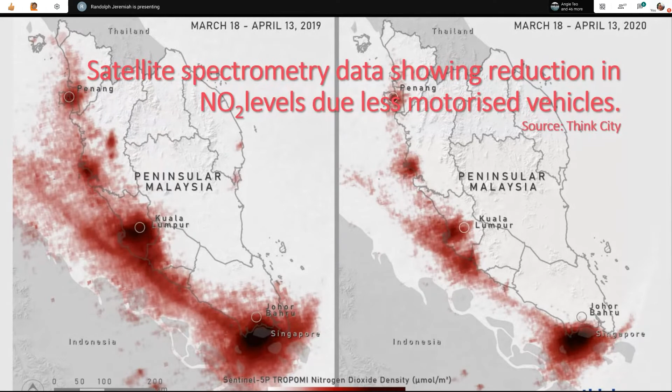In relation to rivers, we know that Sungai Pinang has now turned green from what was before a dark, heavily polluted river. Similarly, in Melaka, Sungai Melaka is reportedly flowing clearer based on DID's observations, and they say it has shown some signs of self-healing.

And of course, we have seen many reports in the newspaper on the Klang River. It's believed to have improved in terms of water quality, and it seems to be getting better—attributed to less waste and pollution going into the river. Local communities themselves have also reported that the river now looks much better than before.

However, at the same time, we are still faced with a number of issues related to water quality. For example, there was a disruption at Sungai Selangor, probably due to odor pollution. Similarly, the waste being picked up in rivers now includes face masks, gloves, and sanitizer bottles.

So against this backdrop, I have a few questions to pose to our stakeholders and to everyone. First, has the river really improved in Malaysia? Second, if it has, is this a sign that environmental damage can be reversed, and if so, what measures should stakeholders undertake post-MCO to better manage our rivers? Or will we adopt a business-as-usual approach?

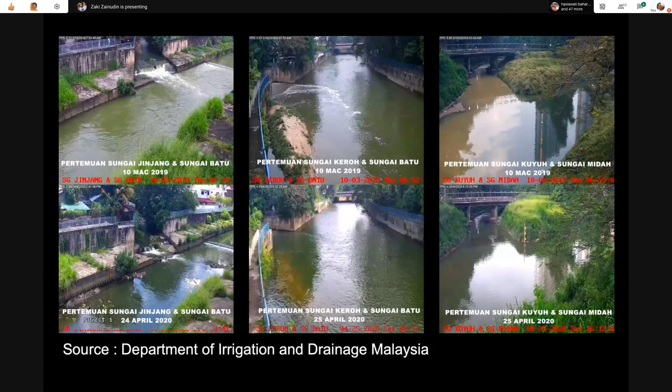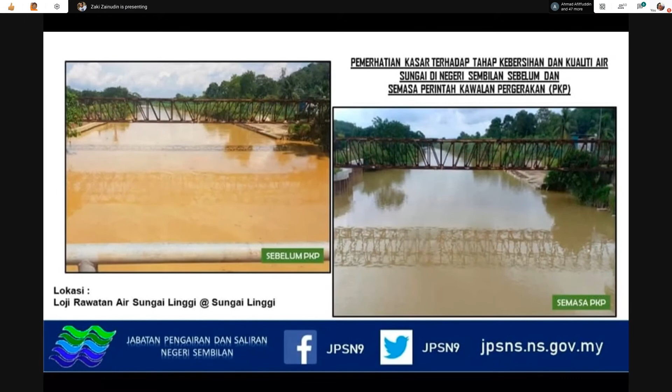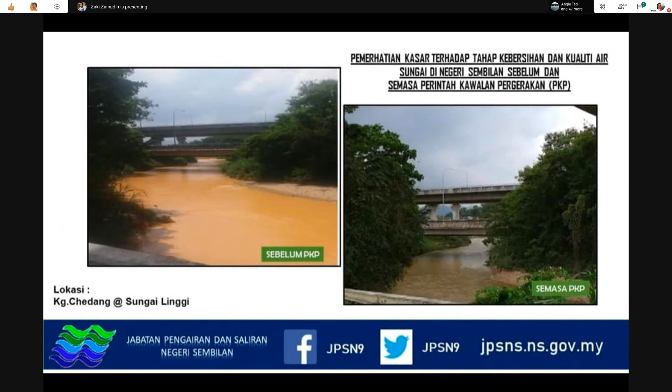As we all know, and as what was presented just now, there have been some perceived improvements in river water quality. These are pictures I got from the Department of Irrigation and Drainage's Facebook page. You can see, like in Sungai Linggi, for example, before the movement control order the water quality was turbid, and during the PKP there seems to be a perceived improvement in river water quality. Similarly, Sungai Linggi on the other side also shows this perceived improvement, and in Sungai Malacca and Sungai Kim Kim, all seem to have improved in terms of visual appearance.

So this was actually reported quite extensively in the media, not just here in Malaysia, but also in various parts of the world—this visual improvement in river water quality.

So it seems that some of the river water quality in various parts of the country has improved. However, I would also like to remind you that perceived improvement is one thing, actual improvement is another. Sometimes it's a matter of point of view.

There is definitely some perceived improvement in certain river systems, but whether that can be substantiated with scientific data, that's another matter. Now this is the official water quality result published by the Department of Environment, Malaysia.

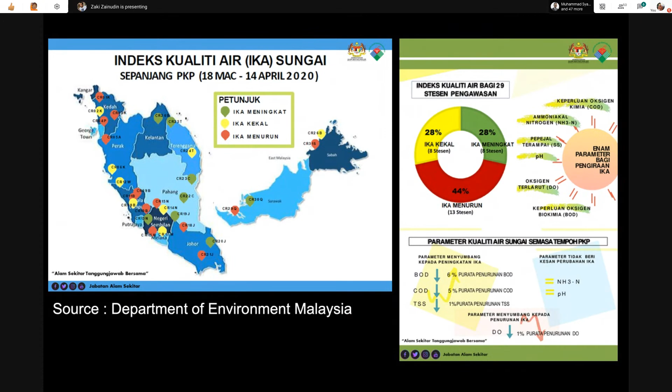The problem with substantiating water quality during the MCO is that there are some limitations with regards to sampling. Now thank goodness the Department of Environment actually maintains online telemetry stations. There are 29 online stations as of the moment.

So these stations monitor parameters like dissolved oxygen, temperature, conductivity, salinity, BOD equivalent, COD equivalent, TSS, ammonium, pH, and certain hydrocarbons. The measurements are taken at every 30 minute interval and they are logged. So these are continuous stations.

The data is monitored online, continuously online, and that's pulled to a data center located in DOE HQ. So this is a sensor.

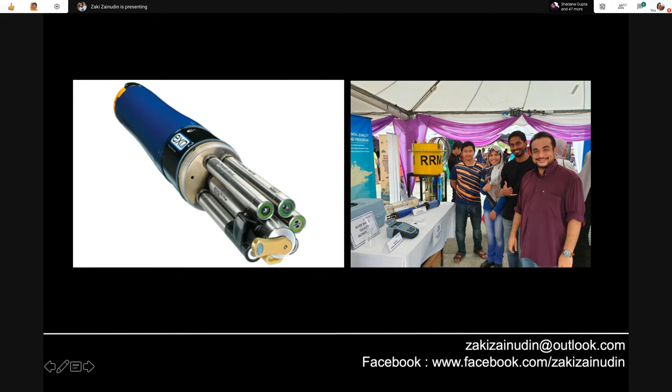This is their sensor, an example of one of the sensors in one of the stations. As I said, there are 29 of these online sensors all over the country. So this is the setup. These are my students from UTM. I brought them to doing Hari Alam Sekitar Negara.

So this is an example of the layout of the telemetry station data center in DOE HQ. The data basically gives the WQI output from the online stations, and that gives the WQI classification, the water quality index classification. So that preliminary analysis was done by DOE because of

certain hindrances to do sampling, manual sampling during the MCO. That data, the water quality status, was actually from the online stations, not the manual stations per se.

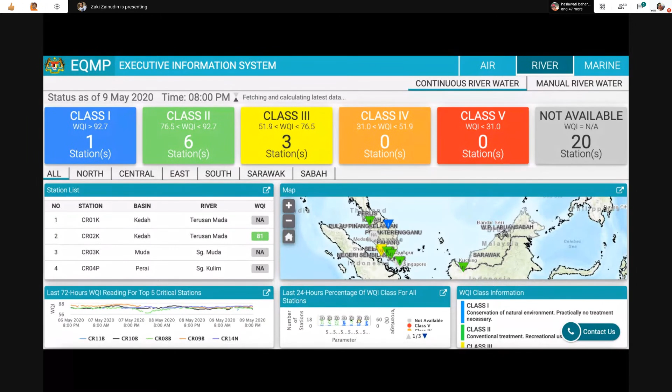Based on data from the online stations that they have at the moment, 8 stations out of the 29 stations showed water quality improvement. Whereas another 8 stations, which is another 28%, did not show any improvement.

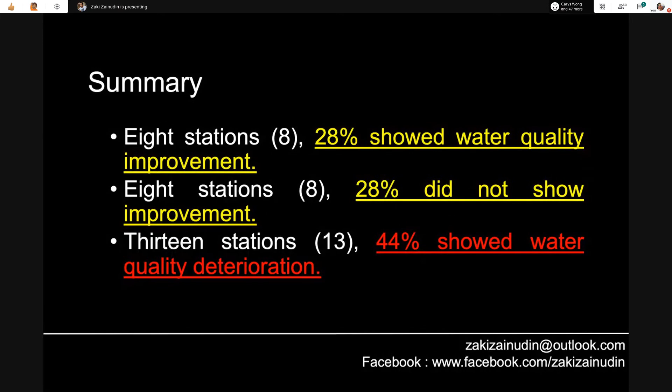But ironically, 13 stations from their online continuous stations, which makes up 44% of the stations, actually showed deterioration in water quality, which is very, very interesting. So sometimes perceived improvement is one thing, but finally the data is showing these variations.

Now the data also shows that there is some average improvement in BOD and COD. But again, BOD reduced by 6% and COD by 5%. It's also important to remember that these are BOD equivalents as monitored by the online stations. Average ammonia generally remained unchanged. And TSS and garbage also increase during rainfall in certain watersheds.

Now this is another thing. When you talk about improvement pre and during MCO, there has to be an apple-to-apple comparison.

But the tricky part is the MCO more or less happened at the beginning of the rainy season. So there was an interference in terms of weather influence on river water quality and runoff influence. So to say there was a blanket improvement, you have to be very careful about that.

And that's why when I was asked by the media for my thoughts, I just said that it's not a blanket improvement. Sure, there are certain improvements in certain watersheds, but it's not a blanket improvement because water quality is a function of pollution within a specific watershed.

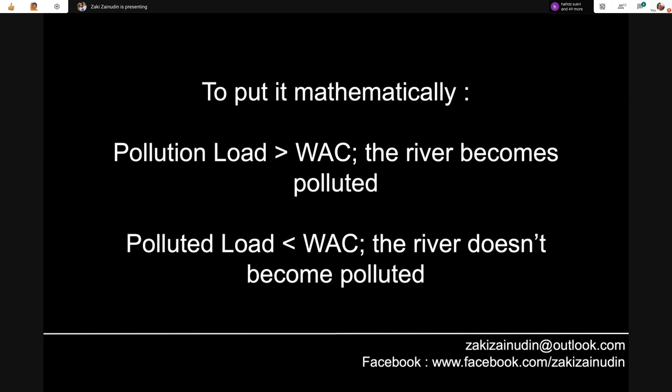And these are all quantifiable. These can be quantified through mathematical modeling, mathematical calculations. So factors that influence the assimilative capacity, the ability of the river to dilute the waste...

Of course, the river size. How big is the river? A river that is bigger, that is larger, tends to be able to take in more waste. The river that is smaller in size and volume would be more sensitive to pollution.

So even the bigger and smaller rivers are influenced by hydrological changes. During the dry period, where there's lesser dilution volume compared to the high flow season, that also affects the carrying capacity. And then, of course, you have the biochemical, the chemistry processes taking place in the water column. So all of this affects the river's carrying capacity.

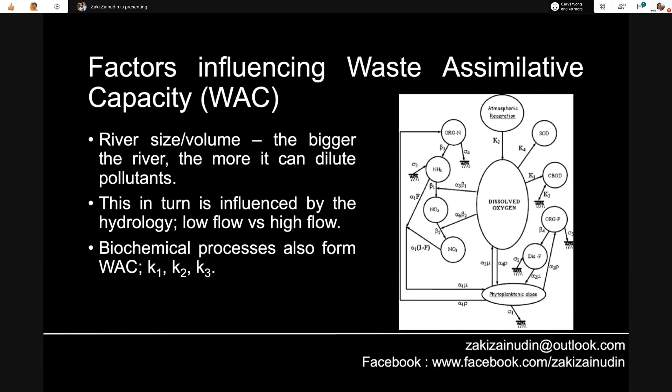Now, in my final slide, I like to show this slide. I always like to show this slide. In a river system, you have many types of pollution sources that are released into the river. You have industrial sources, sewage treatment plants, sewage sources, and sources that are not subject to EQA - say, like on the left part of the screen.

So all these sources are contributing about 230 kilograms of pollutant, whatever type of pollutant, into the river. But then again, the river carrying capacity is 250 kilograms per day. As I showed you earlier, as long as the pollution loading doesn't exceed this carrying capacity, the river won't become polluted.

And then suddenly here, you have an illegal discharge going into the river at 40 kilograms per day. So now the new pollution loading in the river is 270, whereas the river carrying capacity is only 250. So now, at 270 kilograms per day, because of this illegal discharge, the river becomes polluted because it has exceeded the carrying capacity.

But here is the point to ponder. Sure, this is an illegal discharge, discharging at 40 kilograms per day of waste. But then again, all these other sources - industrial sources, sewage sources, other sewage sources not subject to the law - they are discharging 230 kilograms per day, where this one illegal guy is only discharging 40 kilos per day. So does that mean he is the only person to blame for the river pollution status?

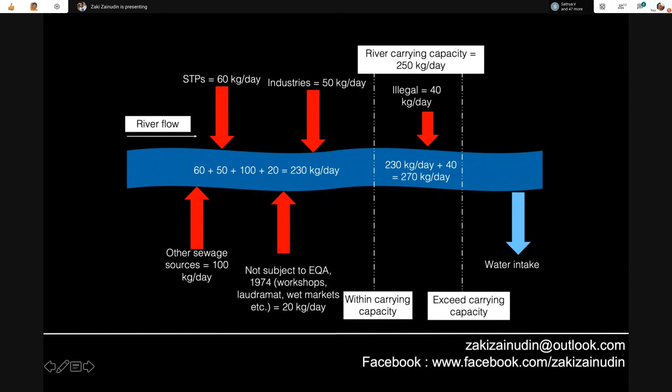All right, so I think that's my slide. Thank you very much.

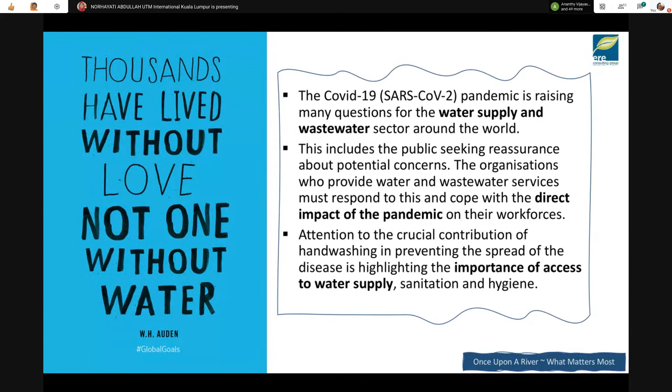Similarly to what Randolph began the session with, as we can see in the newspaper, online, on social media, everybody is focusing on how the movement control order, which came into force on March 18, has led to about a 43% reduction in the total amount of rubbish extracted from Klang River. Bernama, for example, has reported a similar thing. There's a clear indication that the minimization of movement of people and business operations can actually help a river heal - Dr. Zaki has indicated some data that supports this. However, we have to also be careful because sometimes what we see with our own eyes is not the same as what is hidden in the data itself when the river water quality is analyzed.

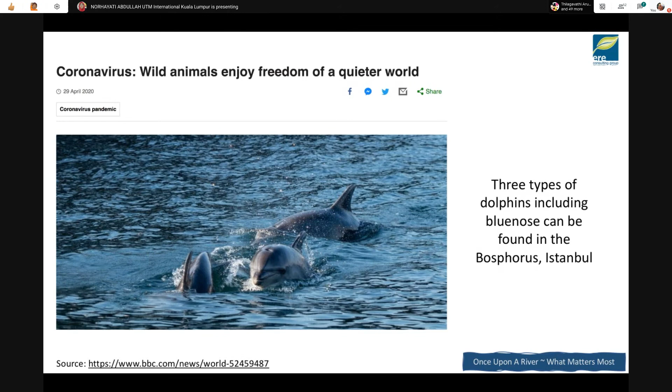Just sharing with you, for example, in Istanbul, wild animals enjoy freedom of a quieter world, coming up to enjoy the cleaner river water. It has also been reported that turtles appear to be returning to Thai beaches, the Himalayas are clearly visible from Delhi for the first time in years, and dolphins are seen closer to the shores in Istanbul.

Here in our country, the skies are blue, the air is cleaner and clear, less noise, and we hear a cacophony of the sweet sounds of nature that we would never have heard or noticed before. So our rivers have also never been so clean.

We have been staying indoors, trying to help the frontliners curb the pandemic, COVID-19. We can say there have been minimal pollutants towards the environment because factories have temporarily ceased operations and there are fewer cars on the roads.

So in over a month, and now we're going to the next level of MCO, reports and headlines have surfaced that rivers across Malaysia look much, much clearer and cleaner, and as reported, we even had wildlife returning to enjoy the clean waters.

So as human beings, as the public, as someone who lives in this world, how would you feel to have all of this maintained post-MCO? It's part of our job to think of what matters most in terms of protecting the continued improvement of our river water quality.

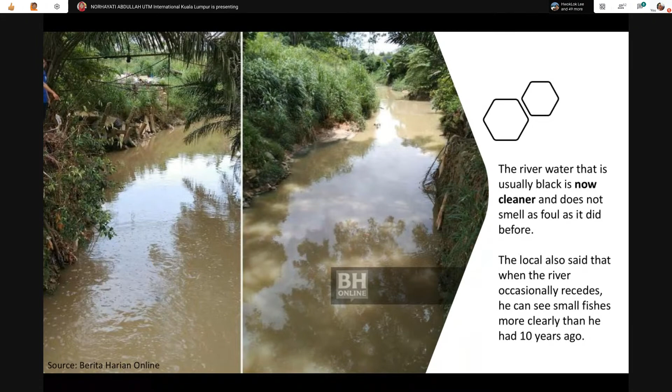Sungai Melaka, as shared by Randolph, you can see the small fishes in the river, it's cleaner and greener. The interview with locals revealed that the river has not achieved this level of cleanliness in a long, long time, and they observe fishes and monitor lizards sighted in the water. So this is a good sign that the river is actually healing in its own way.

Before the MCO, Sungai Melaka water was known for being smelly and murky with teh tarik colored water. This is definitely something that we are not seeing now, post-MCO, after a couple of weeks.

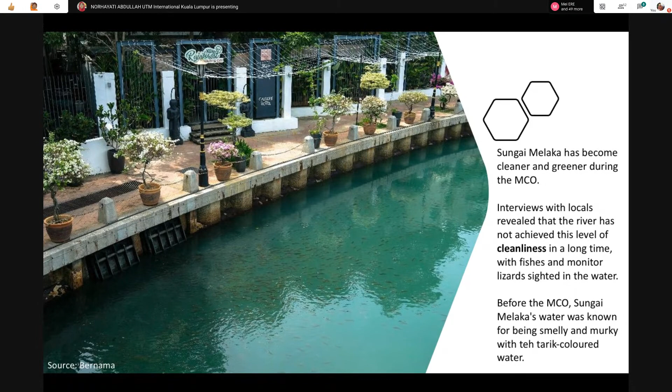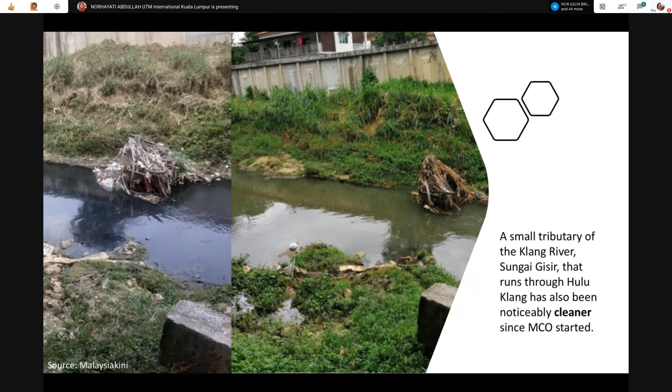And then Sungai Gisir. I'm not familiar with some of these rivers, but I'm sharing with you some pictures from Malaysiakini. This river runs through Hulu Klang and it has been noticeably cleaner. You can see the left picture is black, and the right picture is much cleaner, a jade green color, since the MCO started.

Just to share with you the quality of river water that can enhance our lifestyle - these things can happen in Malaysia too, and not just in Japan. Japan has many good, clean rivers, and all sorts of interesting activities take place in their beautiful and clean rivers. So this is something that we wish to look forward to for Malaysia post-MCO.

We want to have these sort of river water quality activities in our country. I was in Sarawak a couple of months back for a water quality project, and it was very nice, something we should be aiming for post-MCO - this sort of river water associated activities for the public so we could appreciate more what we have in nature. So, once upon a river, what matters most?

I put 3 key points here: raise awareness and educate stakeholders, which many NGOs are currently doing. The MWA and IWA are doing lots of online platform and sharing, and we know that reaching out to public and water stakeholders is very important.

Number 2 is to promote civic consciousness and empower local action. It's our job to take action, and it's our role to support all the initiatives in terms of restoring and protecting rivers.

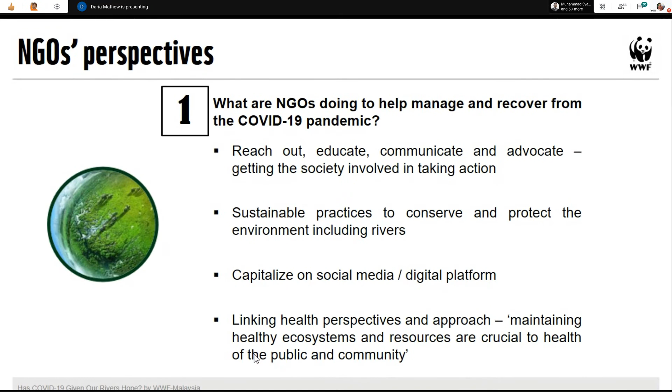I'm showing in the next few slides some examples of the key messages, information, and activities done by the major NGOs in Malaysia. Global Environment Center has been very active - they've done online webinars via Zoom, via Facebook Live, various sessions. They even did training of trainers on River Ranger, on water quality monitoring, via online. So it's actually really possible, even if you don't do it via a physical or face-to-face session. They've also done an Insta video contest.

The contest is actually to promote best management practices. They include themes like 'water is life, river is lifeline' to get the public and society to not lose sight of the river. We are indoors, we don't see the river, it's outside, but through messaging and activities like this, we continue to promote and remind the public not to forget their connection to the river.

EcoKnights is another NGO that has been very active during this MCO period. They've recently introduced their School of Sustainability, an online series that's very interesting and innovative. They do webinars, panel discussions, and workshops, and also leverage on different festivals like Ramadan, Wesak Day, Earth Day, and World Water Day.

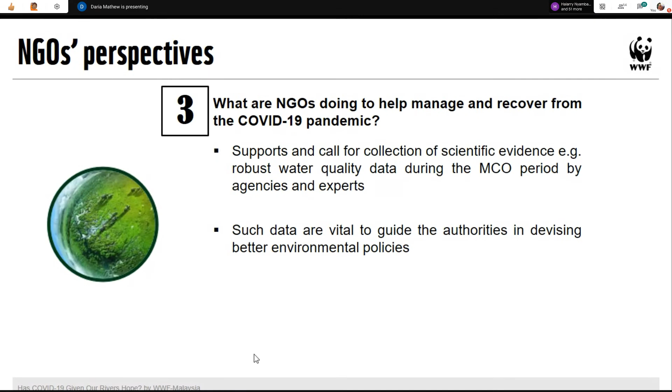Right, so I think I'll stop there for now. Okay, thank you, Daria.

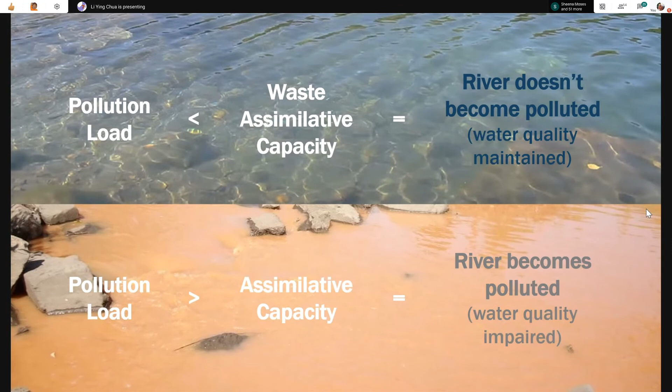For example, imagine large rivers in Malaysia like Sungai Kinabatangan and Sungai Rajang, where the river is huge. Let's say you have 5 palm oil mills discharging into the river—the river itself may be able to accommodate that pollution load. But if we take the same 5 factories discharging the same load and put them into a smaller river catchment, for instance Sungai Melaka, I think Sungai Melaka will be torn apart, because its capacity is smaller than Kinabatangan's.

So this is what we mean by the assimilative capacity or carrying capacity of a river versus the pollution load that goes into it.

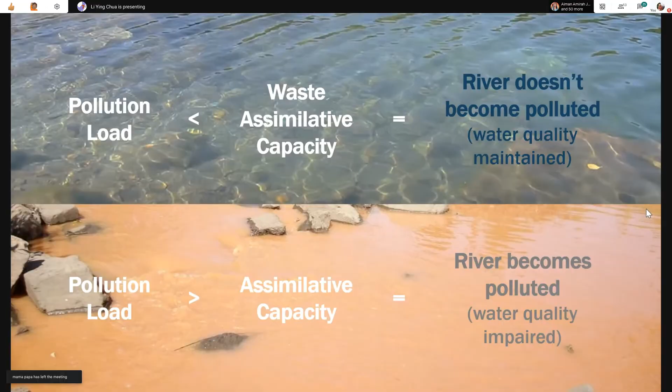A few years back, we carried out a study for a river in Malaysia on pollution load control. What we did was identify all the beneficial users of the river.

Most rivers in Malaysia have similar beneficial users, because rivers mainly function as maintenance of healthy aquatic habitats and ecosystems. They're also a source of water supply for both potable water and industrial processes. As Datin Daria said, 97% of our freshwater supply comes from rivers. Rivers also have value for recreational users, as a source of water for fish production—whether cage culture or aquaculture—for livestock drinking, and of course for agriculture, basically a source of water for our food production in the country.

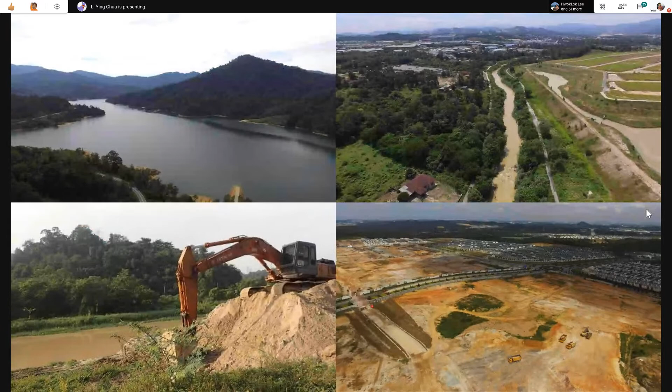When we did this study, the river catchment was quite similar to most rivers in Malaysia. The upper catchment is mostly forested agricultural land. As the river flows downstream, development comes up—you have villages, then eventually townships. That particular catchment is also very actively developing, so there's a lot of new development going on.

This is a construction site for residential areas, and there's also sand mining in this particular river. This river also supplies water to parts of Klang Valley. The water quality of the river is not too bad, but could be better.

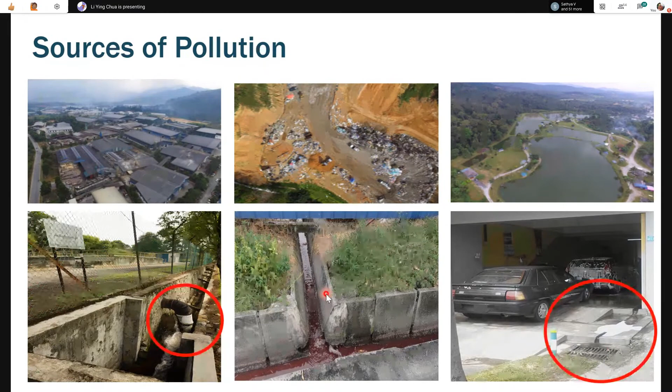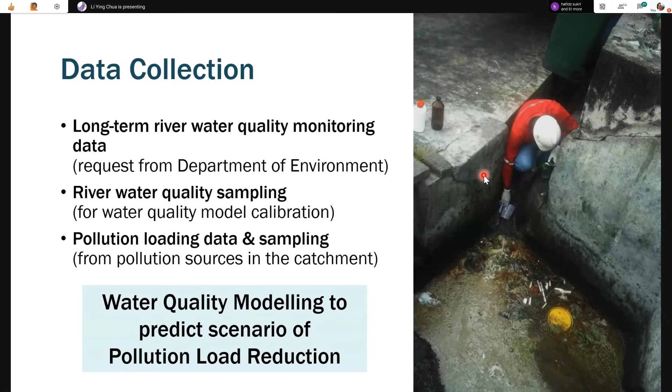With all that, we wanted to do water quality modeling to predict the scenario of pollution load reduction—if we can reduce specific pollution loads in the catchment, what the outcome may be for the river. The first example is sewage treatment plants, because they have the highest loading by premise and cumulatively for ammoniacal nitrogen, mainly due to the large volume of effluent discharge.

You know how Dr. Zaki mentioned just now that a pollution load has two components: you have your flow, which is the quantity of discharge, and you have your concentration, the quality of discharge. So relative to all the pollution sources, sewage treatment plants have the largest volume of effluent discharge because they are servicing the whole population of the catchment.

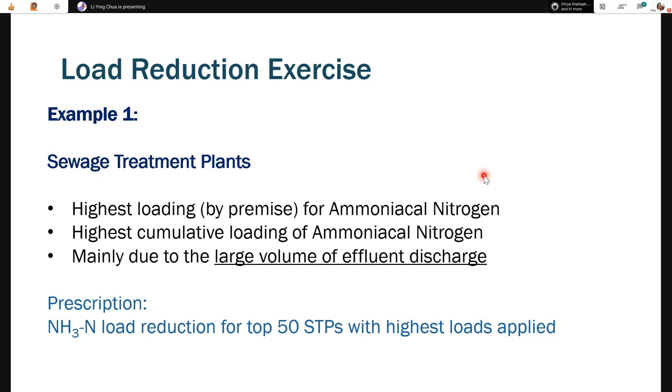So what we did was we prescribed a load reduction to just the top 50 STPs in the catchment. There were about 100-plus sewage treatment plants within the whole catchment, so we ranked them by the ones with the highest loads. We reduced their load by reducing the concentration that they could discharge.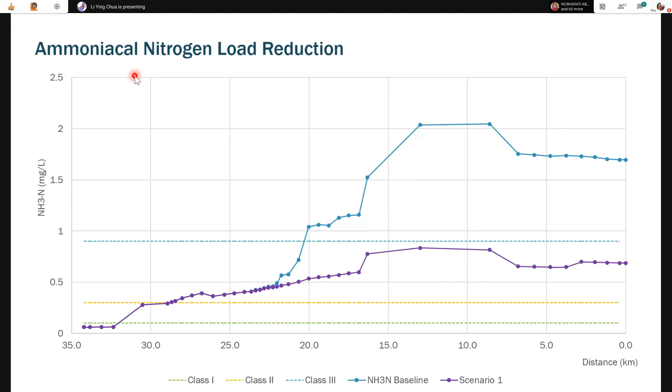Another example is for biochemical oxygen demand, BOD. In this exercise, we are looking at restaurants, wet markets, laundromats, and car washes. Restaurants are the highest load contributor, followed by wet markets, laundromats, and car wash. What we did was have two scenarios: one is a 50% reduction, and the second is a 100% reduction, just to try it out.

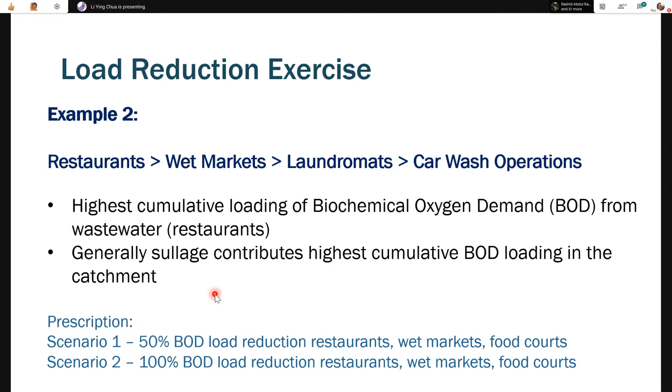So this is what we'll see: this is the existing BOD concentration in the river. Again, this is a different one, a tributary, 18 kilometers long upstream to downstream. With 50% reduction of BOD, you actually see a fall, an improvement in BOD in the rivers. A 100% reduction would be even better. But just from this, you can see that even if you reduce the pollution load from restaurants by 50%, you actually see an improvement in the water quality of the river.

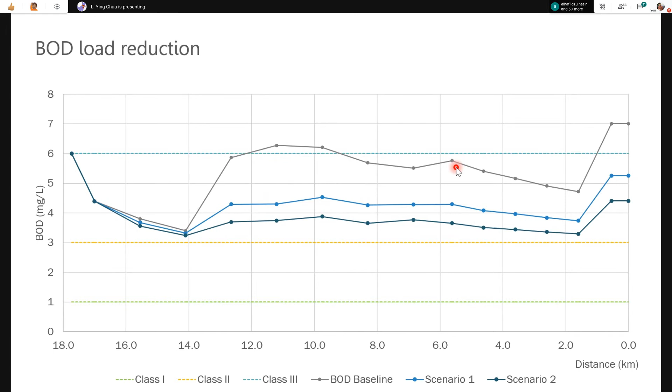A 50% reduction could be like reduced operations or better waste management practices, things like that. But we also have to remember that water quality modeling, to an extent, has limitations. It's academic sometimes—it gives us a snapshot of possibilities, but it may not be exact in real life because there are a lot of other variables that sometimes we cannot capture in our model. For instance, in this whole thing, I did not mention non-point sources, like runoff from construction sites and all that. There's also unrecorded pollution sources, because we can find as many as we can, but there are always pollution sources that might fall through the cracks or are very hard to document. The weather factor sometimes gives us a variation of outcomes as well.

So to me, the MCO was an excellent opportunity to observe what happens when pollution sources get switched off. Because prior to this, when we did our modeling, this is what we aspired to, what we hoped it could achieve, but we could never actually turn off or stop restaurants from operating or things like that. But the MCO actually gave us the opportunity to see that.

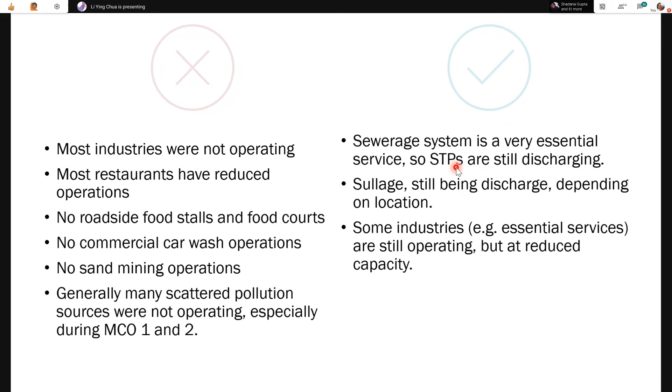That said, I was thinking about some of the research opportunities that we can do post-MCO. Firstly, on water quality trends. I think it's very important and very interesting to see the data trend before, during, and after MCO. Although during MCO we might have a limited amount of data, it'd be interesting to see were there any changes and how big were the changes, and what were the parameters, because the parameters actually indicate to us what are the pollution sources contributing to it.

So it'll be interesting for someone to pick a catchment, a small catchment, and do this. From there, you can actually pinpoint what are the pollution sources that are actually affecting the water quality of the river the most. And through that, look into opportunities of whether it is possible to continue reducing the load from those pollution sources.

The second one is about maintaining good water quality. The issue here is that post-MCO, people and the economy will try to pick up again. And as we know, the environment typically has the lowest priority. Everyone wants to recoup their losses and all that, so investment into pollution control technology will be at the bottom of the list, because it will be extra expenses.

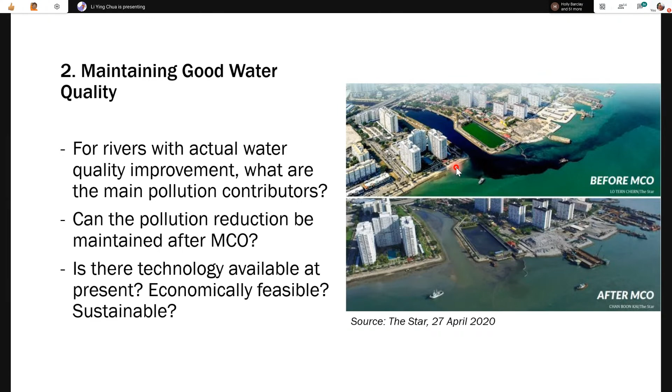Okay, thank you, Li Ying. I'll just go through some questions right now. I may post some to some of our panelists.

First of all, in terms of data, of course we do have data. The Department of Environment still monitors data, although during the MCO period, most data was from the automated monitoring stations. It would be interesting to compare data before and after MCO, and also compare data with the same period over previous years. So I think that is something that can be put in motion after the MCO is lifted, and it will be interesting to see whether there are significant results as a result of the MCO.

There was another question in terms of what is the role of local authorities. As Li Ying has just shown, local authorities have a significant role to play in river water quality improvement. The Department of Environment, for example, only monitors large pollution sources, the factories, etc. However, there are many smaller pollution sources which fall outside their authority — wet markets, car washes, etc. They also contribute, and of course food stalls, etc., and that's actually a significant load.

Okay, to another question in terms of what are the sources of pollution?

Ong Kiam Min asked what are the sources of pollution. Actually, based on long-term data, probably sewage treatment plants are a major source of pollution. Don't blame IWK, you have to blame yourselves, because everyone here actually contributes to sewage.